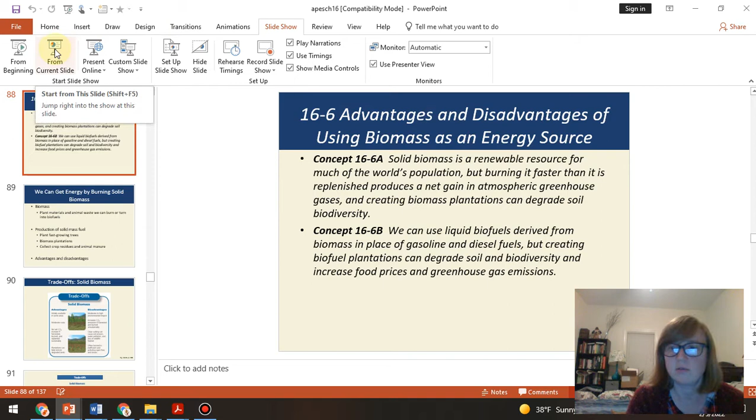Also, I don't know if you knew this, folks, but I can look at the YouTube analytics and see how long you spend watching the video. So if you're taking notes, how are you doing that if you only watch like 20% of the video? Just so you know, I know. And that's where you're going to get the information from, if you're going to take a test or anything.

Anyway, back to reality. Hold on. There's my other child, she wanted to be in here.

So what about biomass? What's biomass? Well, bio means life, right? And mass means mass. So biomass, you're talking about formerly living things. So we're talking about things like trees, stuff you can burn, like that.

A lot of the world's population relies on biomass for their energy, like burning wood. But the problem is if you burn it faster than you can replenish it, then you end up adding greenhouse gases. So if you burn more trees than are being planted and growing, we're going to have an increase of CO2 and greenhouse gases, which is bad.

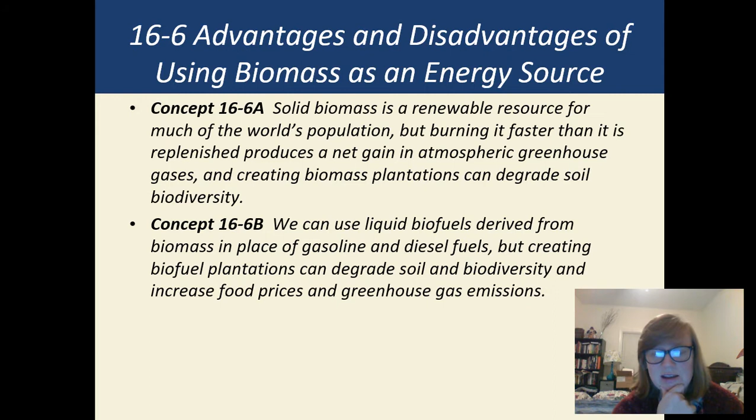And in that spot where you're growing plants for fuel, that's where you could be growing food. So you're going to increase food prices, and you're going to increase greenhouse gases. So there's a trade-off to that.

So what is biomass? It's plant materials or animal waste, like literally poop, that we can burn or turn into biofuels. So how can we do that?

You can plant fast-growing trees. You can have tree farms with biomass plantations. You can collect crop residue and animal poop.

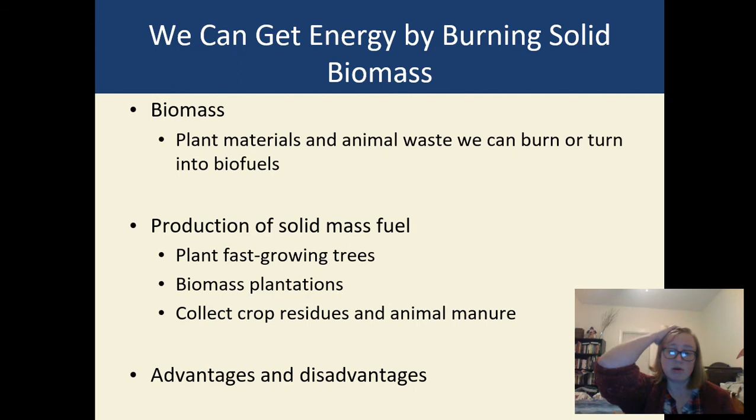Think of the farm right next to the school. They'll have their crops and grow different things there, some cotton, some tobacco. Let's say they grow cotton - we just want the little fluff part. What do you do with the rest of the cotton plant? You got to get rid of it. So you could collect that stuff and burn it for fuel. That's what we're talking about there.

Remember, you can always pause and look at the trade-offs here, the advantages and disadvantages. I'll go over them quickly, but if you need to write stuff down, pause the video. So biomass, what's good about it? It's everywhere, it's trees.

The cost is moderate, it's not super high. I mean, it costs something to grow a tree or have a tree farm or have loggers come in and ship it and cut it. If you are doing this sustainably, replanting trees for every tree you cut, there's no net CO2 increase. You're not actually adding CO2 to the atmosphere - you are, but you're pulling it out with these trees as fast as you're putting it in.

And if someone blows up the side of a mountain to get coal, if you replant some trees there, it can actually help restore lands that have been ruined by humans in some other way. Well, okay, this sounds great. Well, what's bad about it?

You have a lot of environmental impact. Have you ever seen someone clear cut a forest? I've seen it happen. I was driving down 64 and all of a sudden I'm like, what's different? I'm like, oh, they cut down all these trees.

So what about everything that lived there - all the birds, all the little mammals, all the bugs, all the other plants that were there? What happened to them? They're gone. And that's just in one little area.

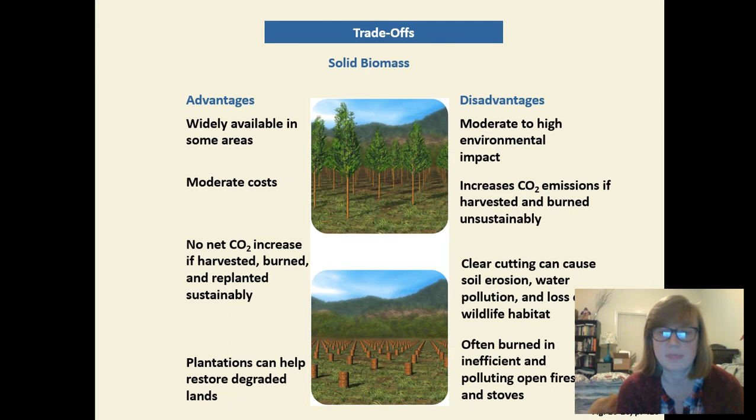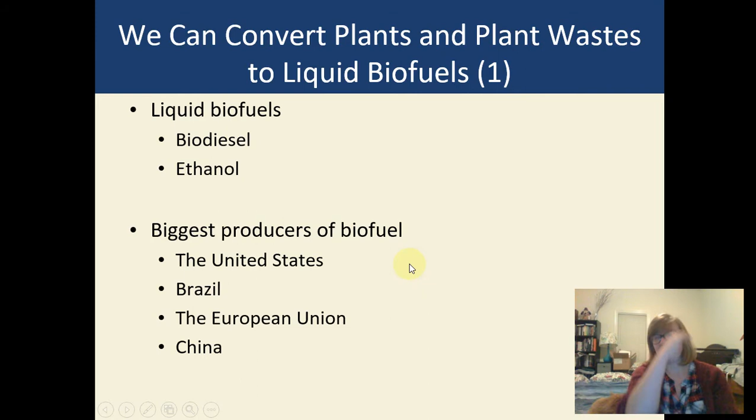So that's not great. But we can take biomass, like wood we collect, and turn it into liquid biofuels - biodiesel and ethanol. The biggest producers of biofuel are us, Brazil, the EU as a whole, and China.

So advantages of using that instead of gas: these biofuel crops can be grown almost anywhere, while oil is only available in certain places. If you manage this properly, you don't increase the CO2 in the atmosphere, which means less greenhouse emissions. And it's available now.

1-800-441-2400 for 10 easy payments of $99.95.

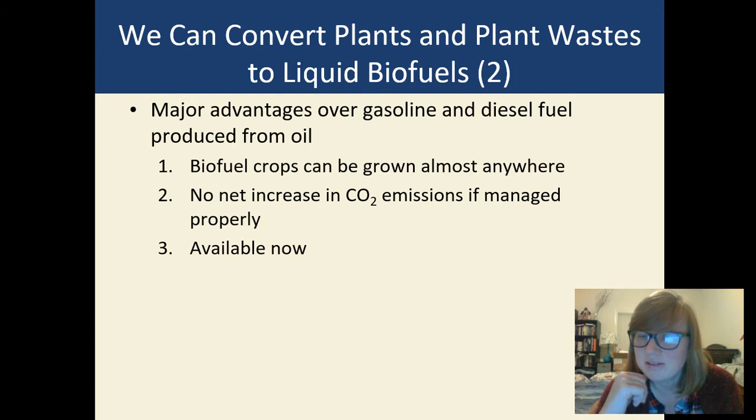Do they still have those commercials on TV where some guy tells you, back in my day, it was like music compilations - Pure Moods Volume 1 or Secret Love with soft rock favorites. Those things existed. One day I'll have to show you guys, you probably know what I'm talking about. Kidz Bop, do you remember? Do they still have commercials for that? I don't have cable, so I don't know. Okay, anyway, back to reality.

What about problems? Let's say I'm just planting bamboo. Well, the only things that can live there are things that eat bamboo and can grow around bamboo. And if I'm growing it to harvest, I'm going to pull up any other weeds so my bamboo grows really well and I get the most crops I can. So that leaves very little room for anything else to live there.

And if you remember from biology, everything is interconnected, right? In the food web, in nutrient cycles, we rely on all the different creatures you can and can't see, even the little microbes in the soil, to work together and keep the environment healthy. When we just plant one single crop, we lower biodiversity, and we end up with a less healthy environment because there are fewer different types of creatures there.

Like I said before, you're going to increase soil degradation - that means the soil is going to get kind of crappy. If you know about agriculture, you know you have to rotate your crops because certain crops will pull nutrients out of the soil, and other different crops might pull back different nutrients or use a different type of nutrient in the soil. So you end up wearing out the soil.

It can push farmers off their land because you say, okay, we're going to use this land here just for growing biofuels and not food. So you've got to go somewhere, and that could cause an increase in food prices.

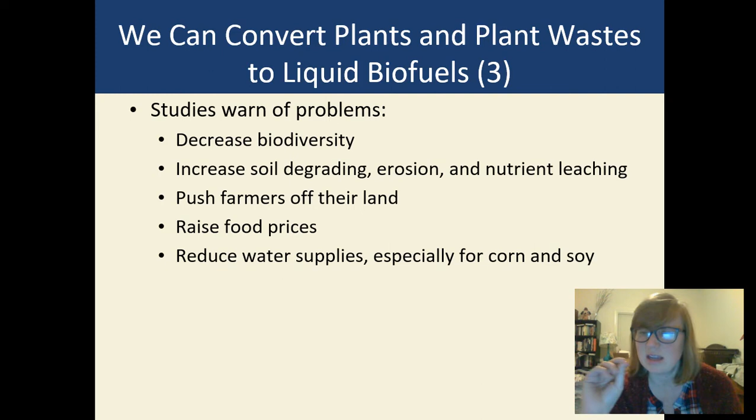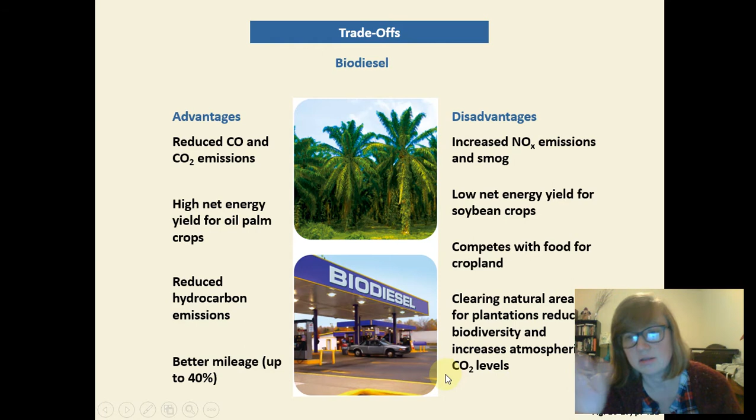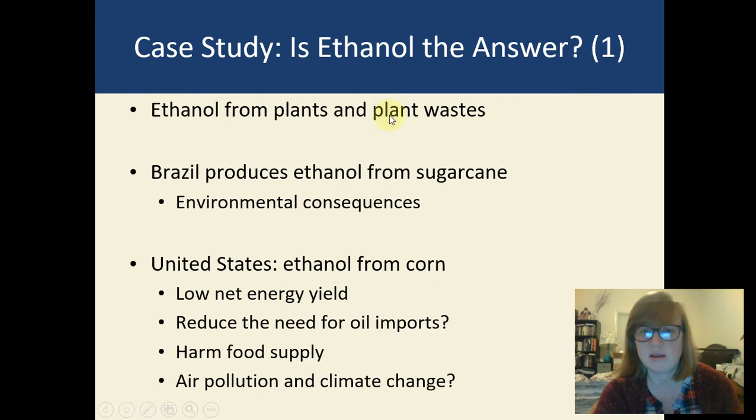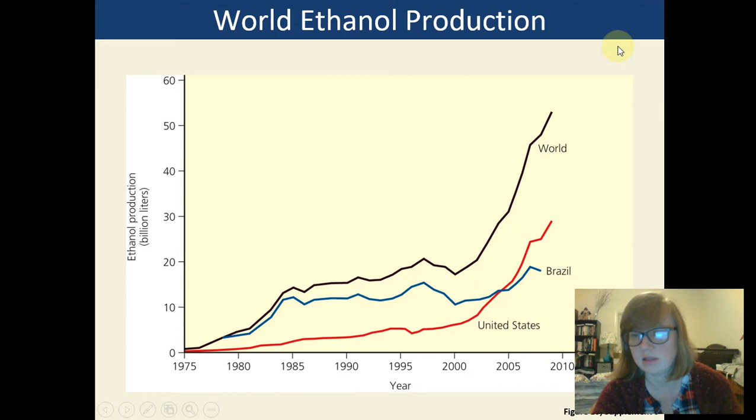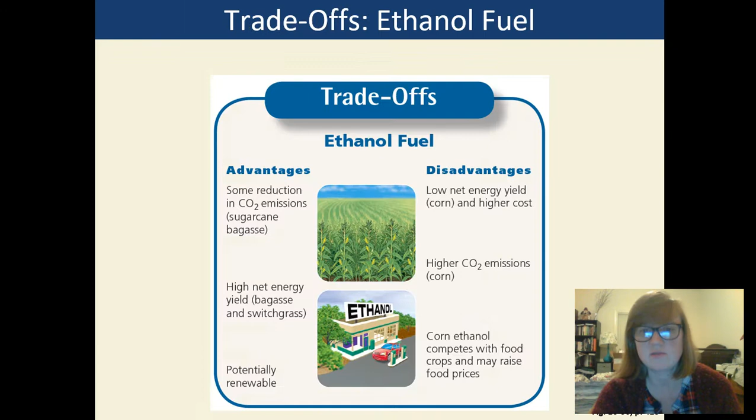So, okay, we've got ethanol. You could go to the gas station and see something say contains no ethanol, or contains X% ethanol. I think they still show that. You'll just have to look next time you're at the pump.

It can reduce some CO2 emissions, like if you're using sugar cane. You get high net energy from switchgrass, and also from sugar cane. And it's potentially renewable, right? If you can continue to grow those things and rotate your crops properly, you can continually make this ethanol fuel, so we don't have to worry about running out.

If you use corn, you get less energy and it costs a lot more, which guess what we're using? Corn. That's what mostly we use. And with corn, we actually end up with higher CO2 emissions. And corn ethanol competes with food.

We grow a ton of corn in this country. It's in almost everything. Don't look, I'm drinking a soda, as some people call it. But the first ingredient in a lot of our foods, especially sugary foods, isn't sugar, it's high fructose corn syrup. We have corn in lots of our foods.

We used to have a lot of cropland in this country growing corn. But if we, in turn, take that corn and put it into our gas tank instead of into our food, then the food price is going to go up because there's less food available—it's getting turned into ethanol.

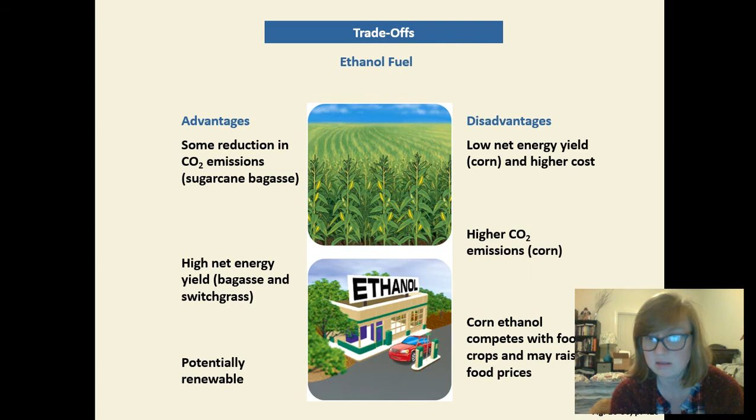This deserves you taking some time to look at this. You can always pause and read this, but I'm not going to go over it.

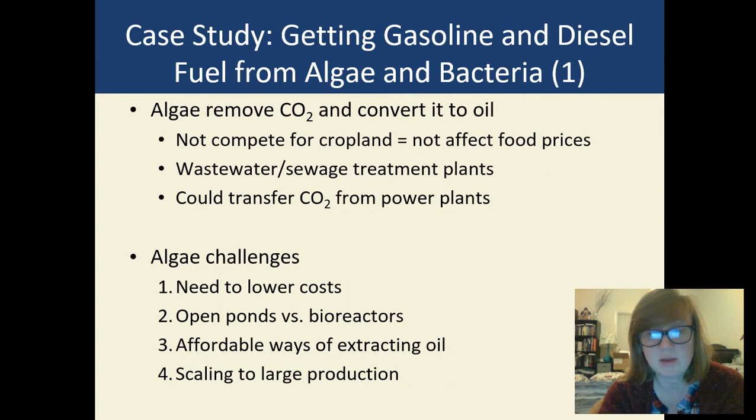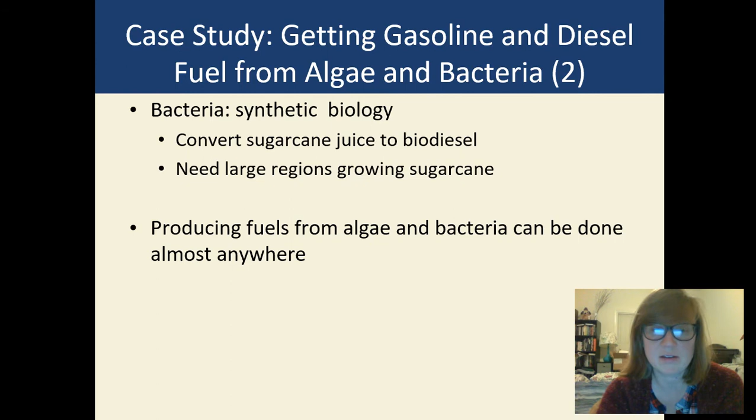But maybe we can get gasoline and diesel fuel from algae and bacteria. Maybe we can eventually use living creatures like algae or bacteria to produce fuel for us. That would be something—listen, if you want to be a millionaire, figure out how you can do that. She wants to be a millionaire.

So what about geothermal? Geo means earth, thermal means heat. So we're talking about heat from the earth. Geothermal energy actually has really great potential.

Think about the layers of the earth, which maybe you remember. If you don't, outside is the crust, then the mantle, and then the core, which is the outer and inner core. If you remember anything about the core and the mantle, you know they're hot—do not touch, we can't anyway, but they're incredibly hot. The core of our planet is very, very, very hot.

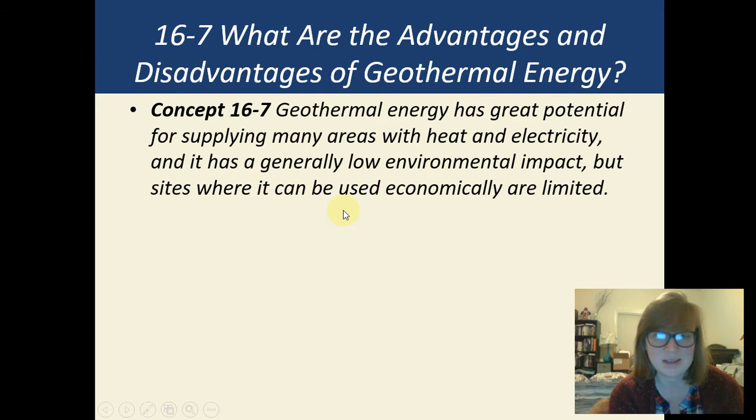There's some natural heat energy there. So if we could harness that and use the steam, or use that heat to boil water and use the steam to turn a turbine, then we'd have electricity. It usually has low environmental impact, but there aren't a lot of places where we have really good access to geothermal energy.

So where is this heat stored? In soil, rocks, fluids in the Earth's mantle. And geothermal pump systems are actually energy efficient, reliable, environmentally clean, and cost effective.

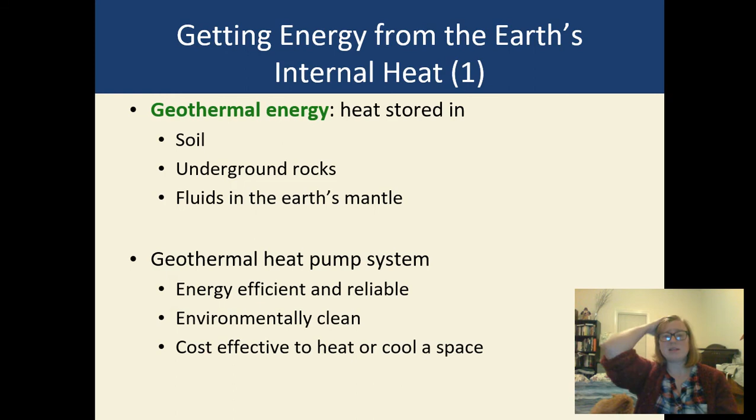These sound great. So basically you get a little pump here, and you pump out the cold air, and here's warm air. We move it through this warm soil, and then it pumps that warm air back in. It's actually usually cooler in the summer than it is in the winter, so that's how you remove the hot air and cool it down.

Around here, because we're in kind of a flood zone, people don't have basements. Where I grew up, all these stories about where I grew up, you always had a basement. We had a basement growing up, and in the winter it was always warmer in the basement, and it was always cooler in the summer. So that's just me knowing a little bit about that firsthand.

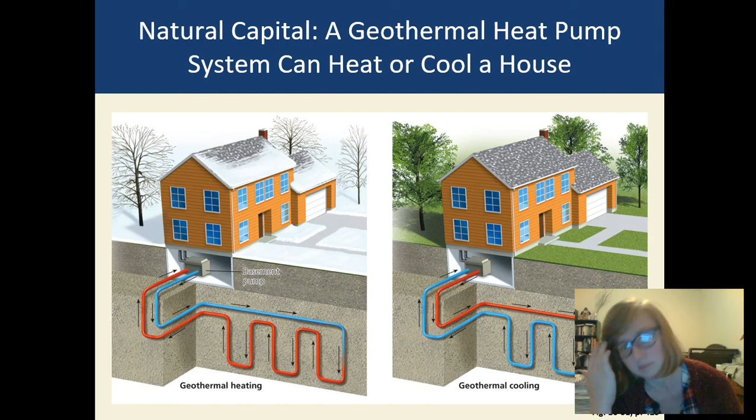So here's just a picture of what I just showed you—winter, summer, winter, summer.

These things entertain me, okay? You got to entertain yourself somehow.

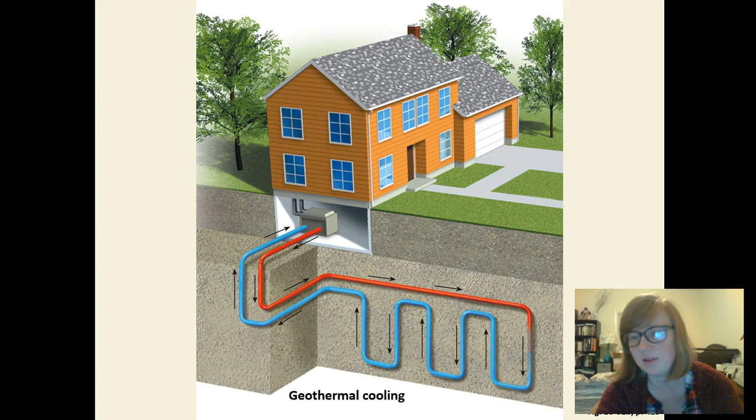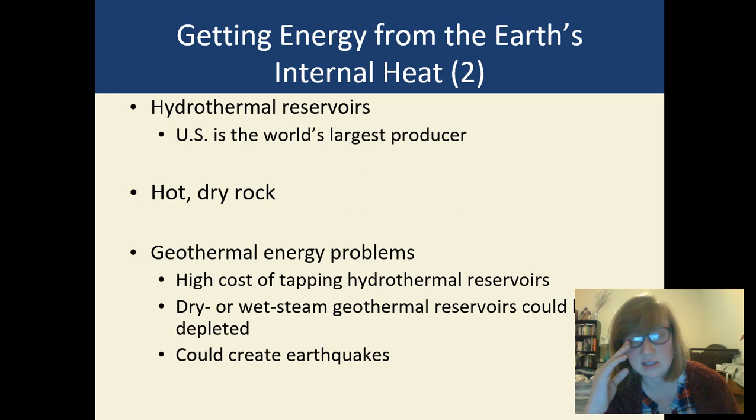So what are some problems? It costs a lot to tap into these things at first. These reservoirs could be depleted, so they could be non-renewable, and it could create earthquakes if we're digging deeply into this area, into the Earth's crust.

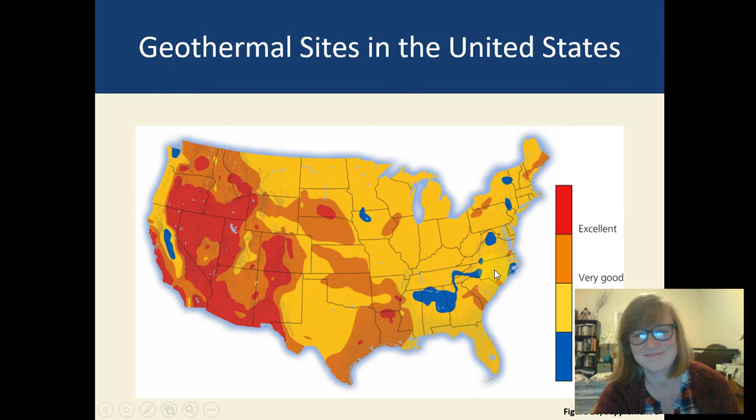Here are some geothermal sites in mountainous areas and desert areas. Not us. And worldwide, here's where they are.

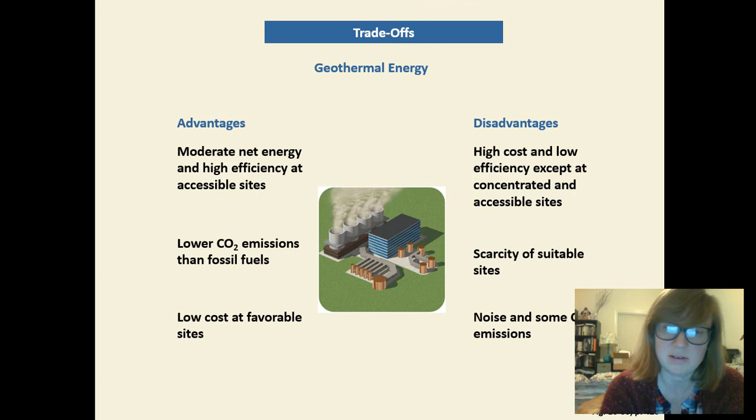That's like, look man, but I wouldn't want to live in Iceland. First of all, think about it. Iceland, I'm not about the cold. And it's so far north that in winter, there are times where they just don't really see the sun. Can't do it, I can't do it. I would need like a sun lamp to live under. But other than that, Iceland would be great.

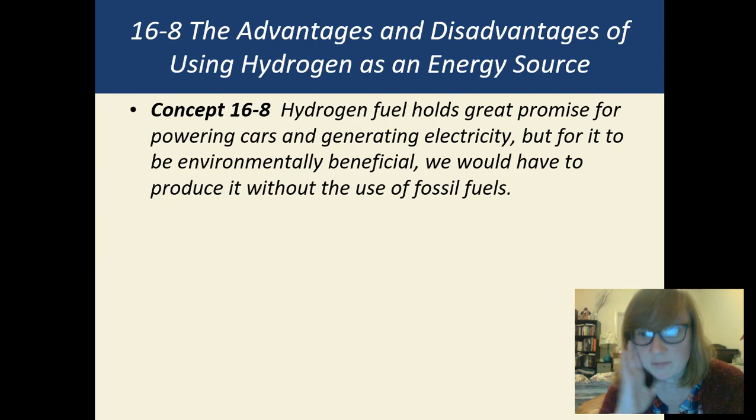So another energy source that I'm not really going to talk to you guys about, but I'm just going to show you, is hydrogen. There's always a rumor like, oh, what if we made a hydrogen fuel cell or that sort of thing? Hydrogen's very flammable. Look at the Hindenburg disaster. When people are like, oh, the humanity, they used hydrogen as the fuel for that blimp, and it started on fire, and it was a terrible tragedy like 100 years ago.

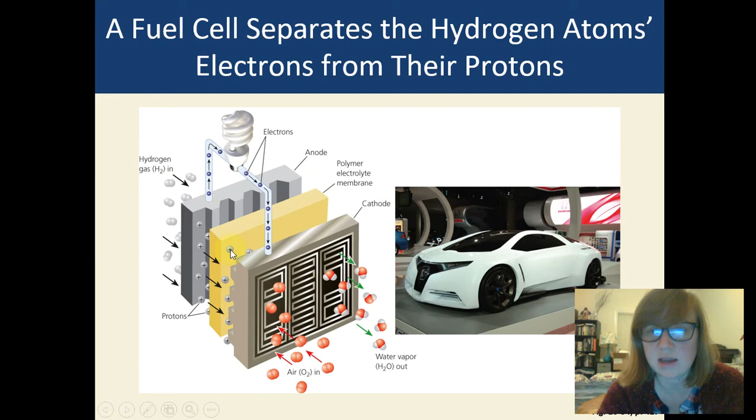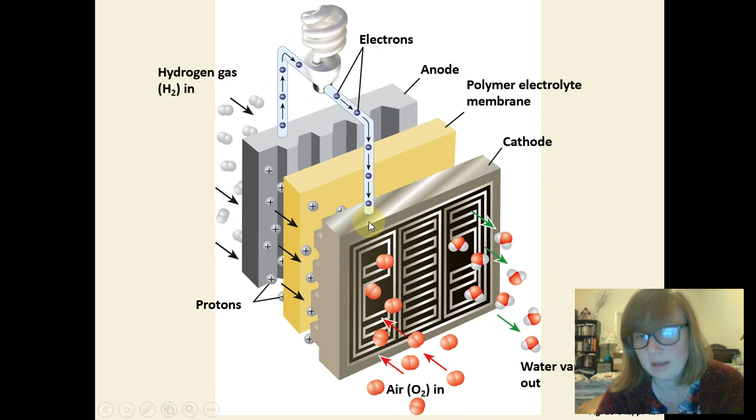So we don't really have a viable hydrogen fuel cell, but if we could figure out how to do that, that maybe could be a really good source of energy. Basically, you have hydrogen gas, you pass protons through here, and you pass the electrons through here. That's electricity, and then there you go. Air goes in and water comes out. So we're not really going to talk about that, but if you're interested, there's some information about it.

That's my child. And maybe you heard the other one in the background.

So basically, we need to work toward a more sustainable future for energy. How are we going to do that? We have to make more energy efficient products like computers and phones and everything that can do the same thing but use less electricity or use it more efficiently. A lot of energy gets lost as heat, or the machines just aren't efficient. That's why you'll see the little energy efficient label on things that used to be bigger.

Hold on a second. Hey Veronica, they can hear you on the thing. You know that, right?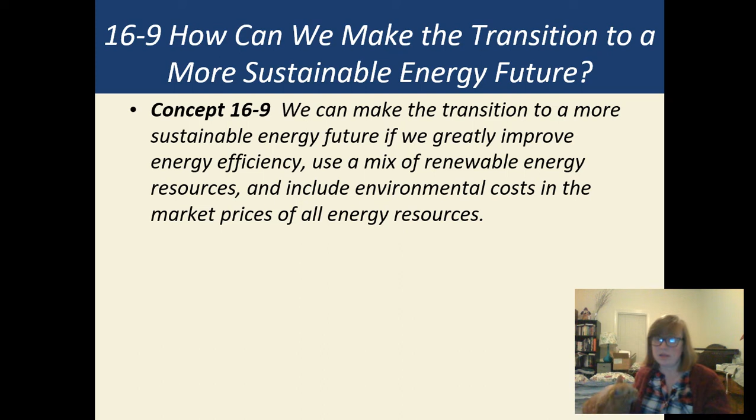We have to mix in renewables with our non-renewables because we don't have the infrastructure to just use renewable energy right now. And we have to include the environmental cost in the cost we pay for all of our energy resources. Suddenly it won't be worth it to use coal and oil anymore—it'll be too expensive. The government will have to subsidize other things. So we're going to have to create a smarter grid that connects our renewables and non-renewables together to deliver electricity to us.

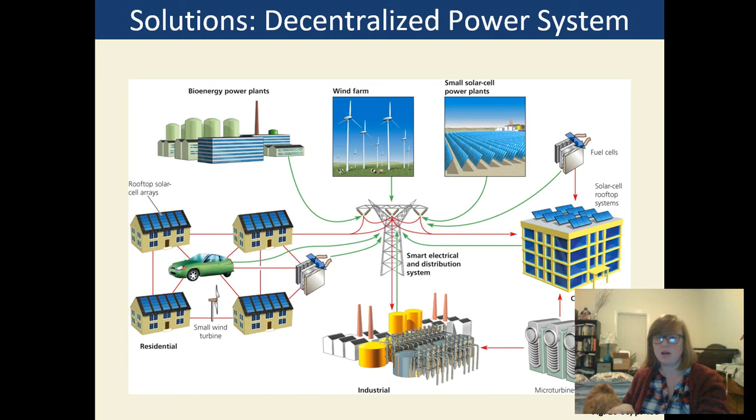Here's an idea of how that would look, and this is the kind of solution we need: improve energy efficiency, use more renewables, and reduce pollution and health risk. This is my house. This is my cat.

If you think about jobs in the future, and this stuff interests you, if you can figure out how to make machines more energy efficient and use less energy while doing the same thing, you will make money. If you can figure out how to make renewable energy resources more efficient for daily and widespread use, you will be a millionaire.

So when you're a millionaire after you figure this out, remember me. Be like, oh yeah, my teacher gave me the idea for this. Remember me, like that song.

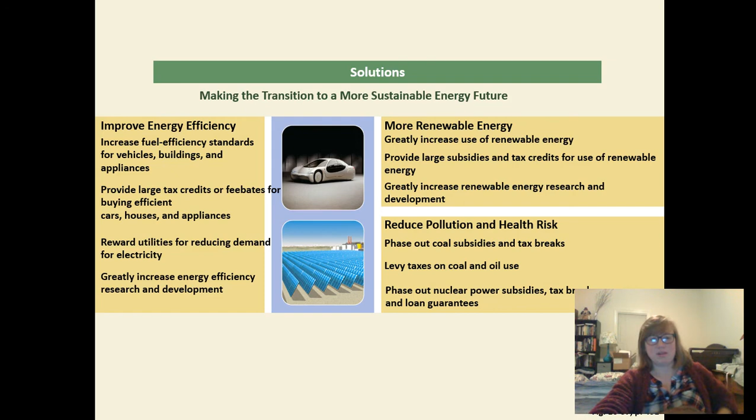The government gets into all this other stuff. It subsidizes things like coal and oil, which means it gives these companies money to keep their costs low. But the government doesn't do that for things like solar, wind, or hydroelectric. If the government subsidized renewable energy resources, that could bring the cost down, and maybe more people would choose something like wind power over coal.

We need to evaluate all of our energy resources based on how much supply there is, how much useful energy we get, and the environmental impact.

That last one isn't really factored in. We're not paying the cost of the environmental impacts of oil—we don't pay the cost of an oil spill. We don't pay the environmental impact cost of coal, where they destroy a mountain and all that plant and animal life is lost—maybe we'll watch a movie about coal soon. And you don't see the human cost on human life from mining this coal.